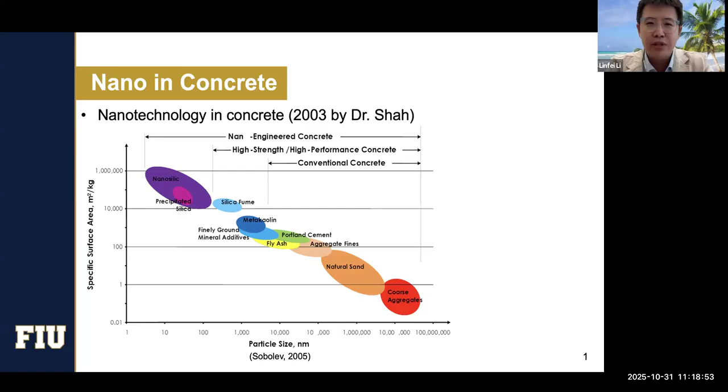So we started adding metakaolin, silica fume, or other fine supplementary cementitious materials. After that we kept diving deeper, and then we thought, maybe we can use nanomaterials as well. There are a couple of different types of nanomaterials - people claim there's 1D, 2D, and 3D nanomaterials.

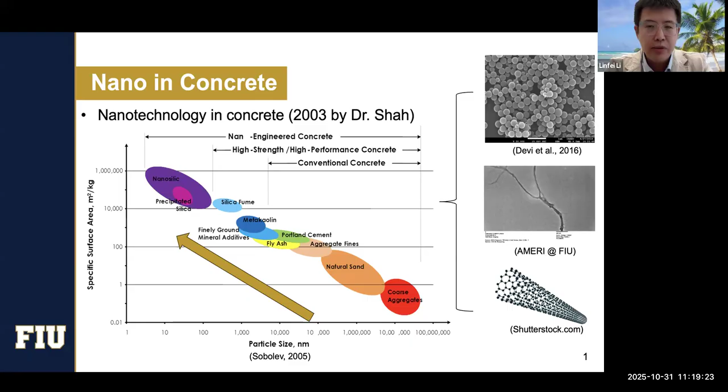To give you some examples: 1D nanomaterial like nanosilica has a spherical particle shape. 2D materials - we took this TEM image from AMERI - is a cellulose nanofibril. And there are also 3D microstructures of nanomaterials, like carbon nanotubes.

But why nanomaterials in concrete? First of all, we have to know that concrete is a porous material. If we take a look at the macrostructure of the buildings we use concrete in a lot, we see it's a pretty solid block. But if you dive in and focus using a microscope, you see the mesostructure - you have cement, sand particles, aggregates - it still forms a pretty solid microstructure.

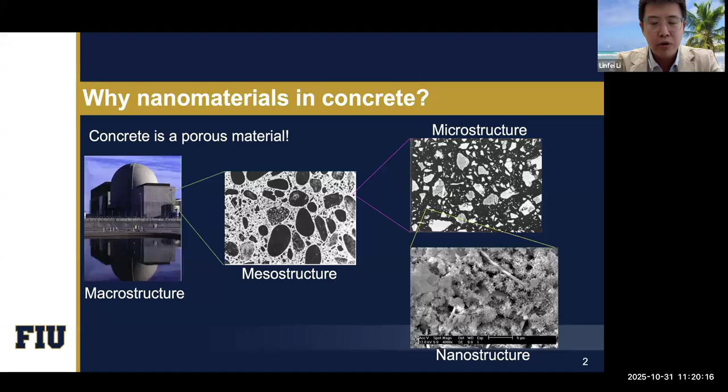But if you further dive into the microstructure level, the cement paste, you have unhydrated cement and hydrated cement. You'll be able to see some pores, but not much. If you further dive into the nanostructure, you can see all the CSH, all the crystals growing, all the ettringite - you can see there's tons of porous media you can play with. That's how we started thinking maybe we can use nanomaterials in it.

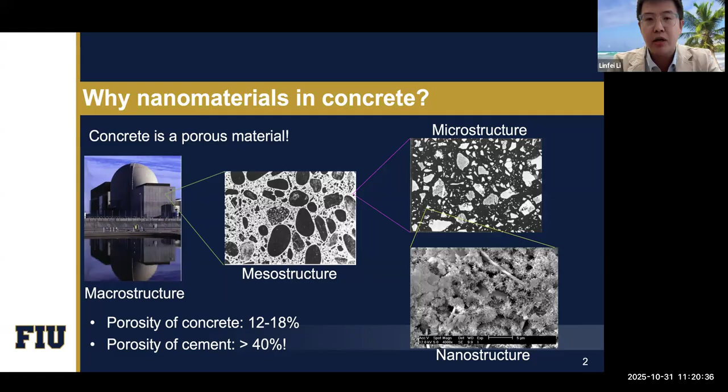To give you some background, the porosity of concrete is usually about 12 to 18%, but the porosity of cement is 40%. So with rocks, gravels, and sand, maybe you cannot do much with nanomaterials, but with cement you have huge possibilities to play with nanomaterials.

Several things we've been investigating in the past years, along with other fantastic researchers - we know nanomaterials could do a lot of good for concrete. Right now it's at the lab scale. We've demonstrated that different types of nanomaterials can improve mechanical performance because they themselves have superior mechanical performance, and they can also densify the microstructure.

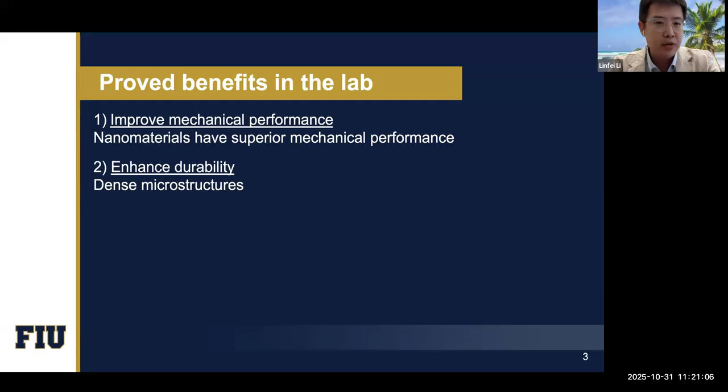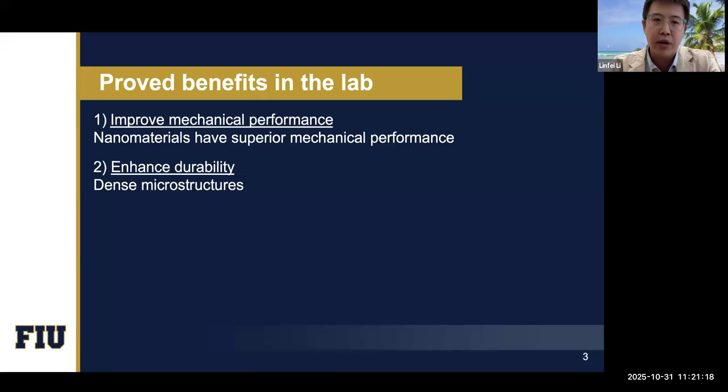Apparently durability is a big issue for concrete. If you can have a denser microstructure - which means filling with nanomaterials makes your concrete denser as well - then you improve the durability.

A lot of research also talks about improved hydration. There's a classical theory called the nucleation seeding effect - because nanomaterials are very small, when you add them at the beginning during the hydration process, the nanomaterials can serve as a seed. Basically all the CSH can grow on the surface of that, so you can improve hydration as well.

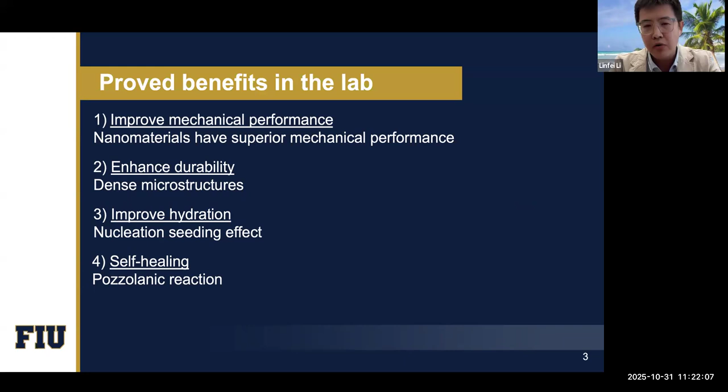Self-healing is another hot topic recently, people talk a lot about it. As a nanomaterial itself, some of them, for example nanosilica or nanoalumina, can form the pozzolanic reaction to improve hydration. Once you have cracks opening, you have the nanosilica in it, so it can further react with unhydrated cement particles, giving you self-healing properties to heal the cracks.

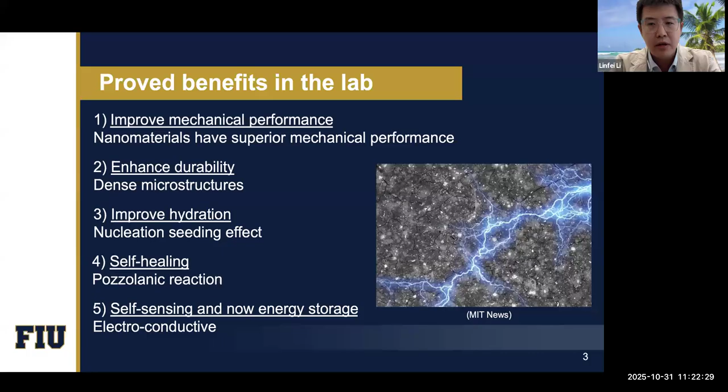Self-sensing is not new, but in the past several years MIT developed electroconductive concrete, or energy storage concrete. People started incorporating carbon black or carbon-based nanomaterials, making concrete not only self-sensing but also able to store energy at the same time.

We got this data from Web of Science, and you can see there are still a lot of interest and tons of publications in the past years. So it's still in a growing trend.

Now we know all the background of nanomaterials. We know this is a fantastic material with tons of different advantages, but we should adopt that in real world applications, right? But the reality is, if you search online, in the United States we only have, I would say, less than 5 demonstration projects.

I took 2 of them. One is from Indiana DOT, where people incorporated nanosilica to do a bridge deck pouring, and the other from Corvallis, Oregon, where people are using cellulose nanocrystals for a parking lot and a box girder demonstration project. You cannot find even 10 projects happening in the US, but we already know this material is good.

Why is that? Simply put, there are only two things. One is about the dispersion of the nanomaterials, because when you really divide materials into the nano level, you have the van der Waals forces problem. The nanomaterial is very easy to agglomerate together, so you will not show the magic from nano, you basically end up with agglomerated micro-level particles.

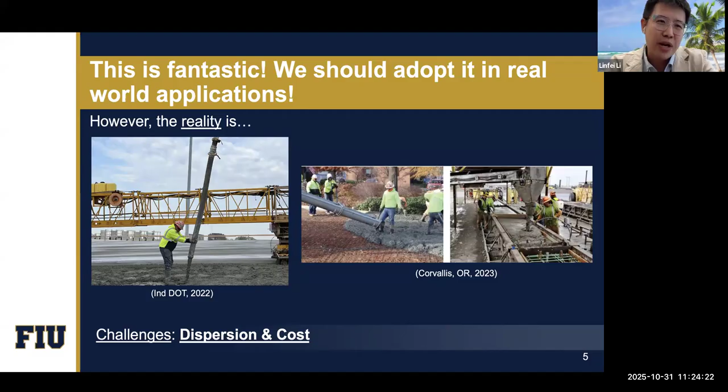So it does not work very well, and it's also correlated with cost, because we all know doing revolution on concrete is very challenging. It's not because we cannot create a better concrete, it's all because of the cost, since concrete is so cheap. Now the question is how you can incorporate a relatively expensive material into a relatively cheap material for wide application.

In the past years I kept asking myself, where is the future of nanomaterials? A couple of things we figured out is that we shifted to two different directions. One is thinking about how we can make nanomaterials cheaper and more sustainable, so we can get extra credits from that and also be more cost compatible with concrete. The other is, for some infrastructure applications where you do not care too much about cost, for example some high-end or special applications, that may be possible too.

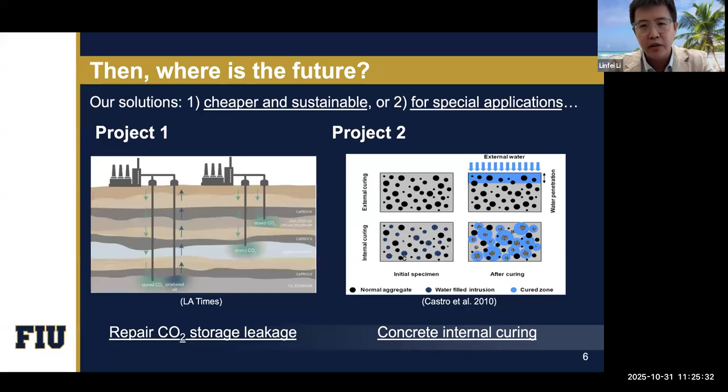So here we're going over 2 different projects for today. The first project I finished a couple of years ago when I was a PhD student, where we incorporated nanomaterials to repair CO2 storage leakage. The other one is an ongoing project, currently using cellulose nanofibril as an internal curing agent. Let's dive into the first project.

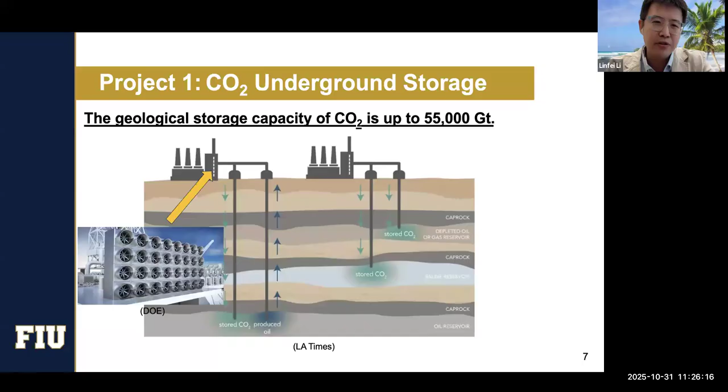Back to 10 years ago, it was a quite hot topic. People talked about the geological storage capacity of CO2, and figured out there is huge potential—you can just store the CO2 underground, because at this moment we do not exactly know how to use CO2 as energy. So temporarily storing it underground is a possible way to do it, and at the same time you can have the oil produced. It's more like a pipeline system. DOE started to capture CO2 from the atmosphere and then used a wellbore system to inject the CO2 underground.

If you take a look at this wellbore system, it basically has a steel casing in the middle, so it's pretty narrow. The width of that sometimes can go below 3 inches. And then you have the rock formation. So people drill a hole and put the steel in it.

But at the same time, you also have to fill the cement in the middle, trying to fill the gaps. Otherwise the gas or oils is going to leak, right? But the problem is this kind of cement has to inject from the steel pipe, go all the way to the bottom, and flow back to fill all the gaps.

So this kind of cement material is very, very flowable, and they do not have any sand particles or aggregates in that. As a result, you can imagine in the underground environment, this cement, because it's very thin, and also because of the underground harsh environment with high temperature and high pressure, is very easy to get cracked.

So once the cement gets cracked, well, the steel casing is only 3 inches diameter. How can you send people like 1 mile or 2 miles underneath to fix it?

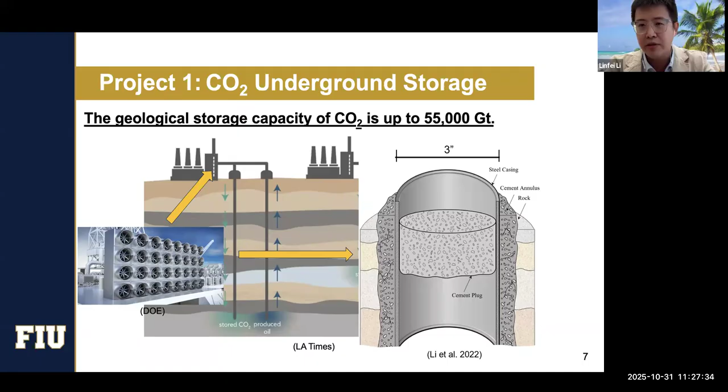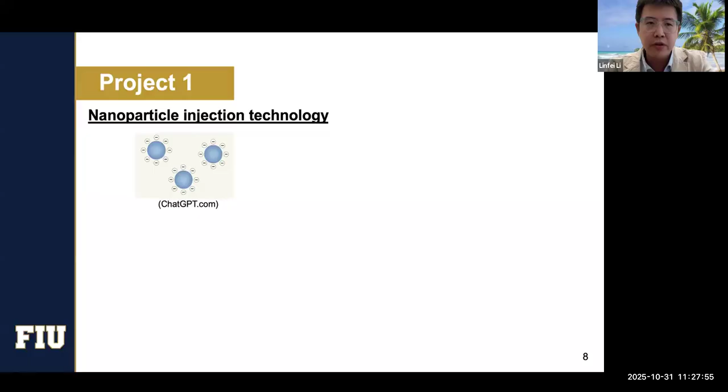That's why we developed this kind of technology. It's called nanoparticle injection technology. Simply said, the idea is that nanoparticles - I would not say all of them, but most of them - have surface charge on it. So we kind of borrow this idea because of the surface charge, and we can generate an electromigration system.

Some of you may be very familiar with this testing setup. It's basically the standard rapid chloride penetration testing system, but we further did some modification on it. On one side, we did not use the sodium chloride solution, but instead we used a nanoparticle solution. Because of the surface charge, you can generate electromigration and use electrical driven force to push the nanomaterials into your cement.

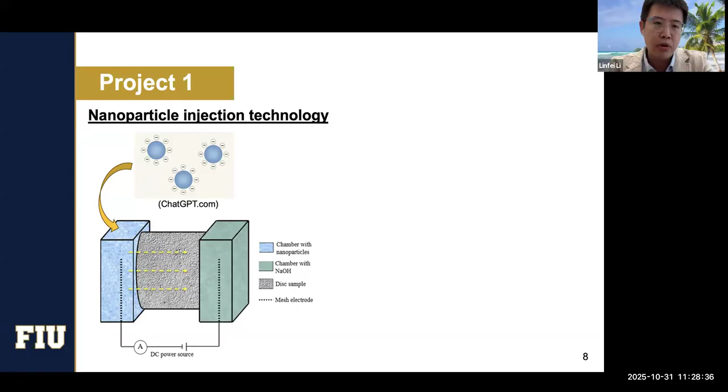This can help to seal, basically densify the microstructure, but more importantly, to seal the cracks. So this is basically the idea - exactly the same setup as the RCPT test.

About this nanoparticle injection, or we call it nano repair, we started doing experiments using something called class G well cement. I don't think it's ASTM standardized, but it was listed in the API, American Petroleum Institute standard. In the standard, they require you to use water cement ratio as 0.44.

Imagine if you have water cement ratio as 0.44 without any aggregates, it's basically just like a liquid, very, very flowable. This is how they use it for the underground project. And we started with an intact sample to see how it works with injection.

But at the same time, we also wanted to see if we really have the cracks. So we artificially generated some cracks as aged samples. And then we put the samples fully saturated, and started running the test.

We do not know exactly which nanoparticle will be the best, so we listed a couple of them as candidates, including a colloidal nanosilica with 22 nanometers diameter, nanoalumina, and TEOS, which is another precursor of colloidal nanosilica. It has better agglomeration control because it does not form particles immediately, but it's a trade-off - it has weaker surface charge.

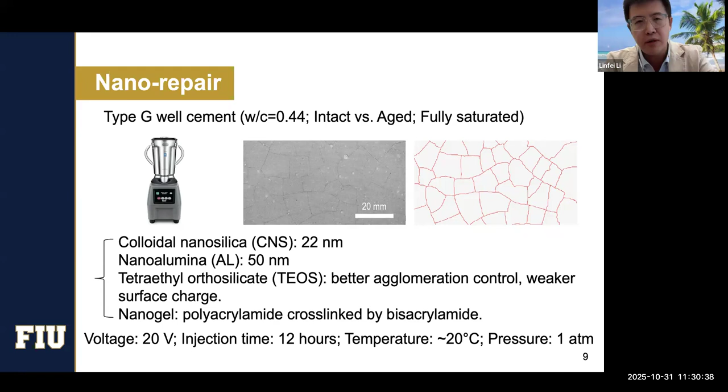So some of the results we have - first of all, we measure the porosity of the cement. As you can imagine, there's no accuracy in that, as also shown in the previous slides. The cement itself has around 40% porosity. We measured exactly the same - we got 42.13%. And then we set up the sample to run in the test.

And after 12 hours, we get it out. We're trying to measure - it's pretty tricky to measure how the nanoparticles seal the cracks. So we started from the porosity measurement. We have the sample, cut it every 10 millimeters as a slice, and then measure the average porosity of that.

As you can see, we have a pretty clear trend. Close to the injection head, there was more than a 2% porosity decrease. If we look at the percentage, for intact samples, the colloidal nanosilica shows the best performance. For the aged samples, it's different.

We need a little more information about the nanogel, because it's a very unique material. When you add the basic cross-link at the beginning, the nanogel is a nanoparticle, but over time this material expands. For an intact sample, once you inject the nanogel, it will expand and further damage your cement. It's kind of tricky. But for aged samples, since you already have large cracks, this expansion actually helps seal the cracks.

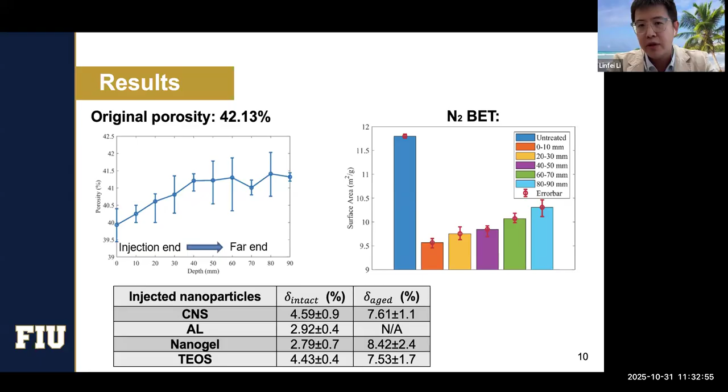We also did some X-ray microscopy. For this, we used custom small samples with a cup as a holder, and added a little water at the bottom. We're trying to see, once the nanoparticle is injected, the sample should be denser, so we expect the water uptake to be much lower. That's why we set up this X-ray microscopy, to see how the water moves up to the top of the sample. Here are some of the results we got.

On the left-hand side is the untreated sample; on the right-hand side is the injected sample. As you can see, there's a clear trend in the intensity, which has significantly dropped. Based on the derivation of that, we're able to track the wetting front as well. So from the X-ray microscopy we can indirectly prove the concept: the nanoparticles were successfully injected and can make the microstructure denser.

One more thing, for the early age profile and later age profile: for early age, we started scanning immediately, but for later age, every time you run the test it takes about 3 hours, so we just ran 2 tests.

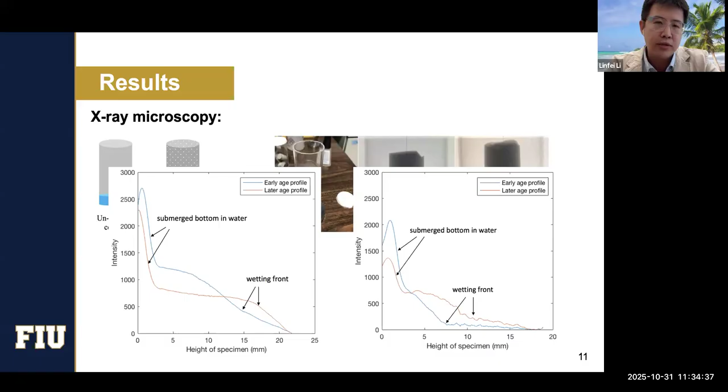We also did some chloride permeability testing, because if you have a lot of pores, your sample is fully saturated, meaning relatively higher electroconductivity. But since silica is more like a semi-insulation material, if your nanosilica is sealed in the pores, the charges or electrons won't be able to pass through. That's why we tested one untreated sample and one with injection, and there's a clear trend there too. The charge passed is significantly lower, about a 24% decrease, meaning chloride ions, once you apply external current, can't easily transport from one side of the sample to the other, just because of the nanoparticle injection.

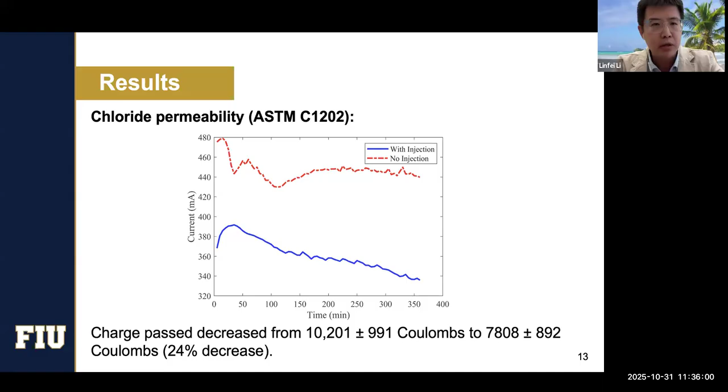All right, so we proved the concept from the small scale, and then we thought about scaling that up, so we did a prototype test. This work took a lot of effort, designing and going back and forth with the manufacturer, and we finally built this pressure vessel, trying to mimic the real underground environment. As you can see from the drawing, this pressure vessel is about almost 10 feet high.

So all the bolts, every time we open that, we have to use the hydraulic wrench. Even opening the lid is going to take us a whole day to do that.

And then to mimic the rock formation, we cut some hollow concrete pipes for it. At that time we double-checked the elastic modulus of the surrounding rock and concrete, and they're pretty similar. So that's what we can use to mimic the rock formation.

But regarding the capacity of this pressure vessel, we'll be able to do a full-scale underground environment simulation. At the same time, this can pressure up to 14.2 megapascals. So imagine if this is fully pressured, it's going to be like a small-scale nuclear bomb.

And it can also hold the temperature up to 90 degrees. So we're using 90 degrees C to mimic the cement curing in a realistic condition.

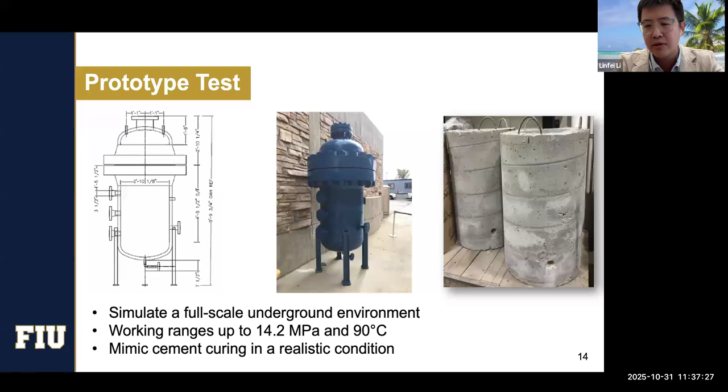So for the test setup, we set up a steel casing, which is exactly the same size as for the underground project. We put that in the middle, and then cast the cement between the concrete surrounding and the steel casing. Later on we took it out and ran the injection.

So we set up two reservoirs, like we did for the small scale — one side is the sodium hydroxide, the other is the nanosilica. We figured nanosilica might be one of the most promising ones, so that's why we took it as one, but we also tested other different types.

To mimic the real underground environment, we boosted up the temperature from room temperature, as we did for the lab scale, to 80 degrees C. And we also pressurized that from atmospheric pressure to 6.89 megapascals. We didn't go to the maximum because I feel like we have some safety concerns on that.

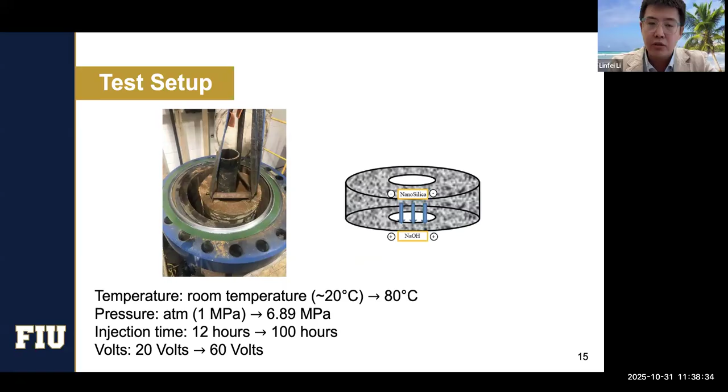Also, because the sample is much, much larger, the injection time extended from 12 hours to 100 hours, and the voltage from 20 volts to 60 volts.

So here's some preliminary data we got from that. As you can see, we did the same thing — we basically drew a core from the sample, then cut that into slices, and measured the porosity of that.

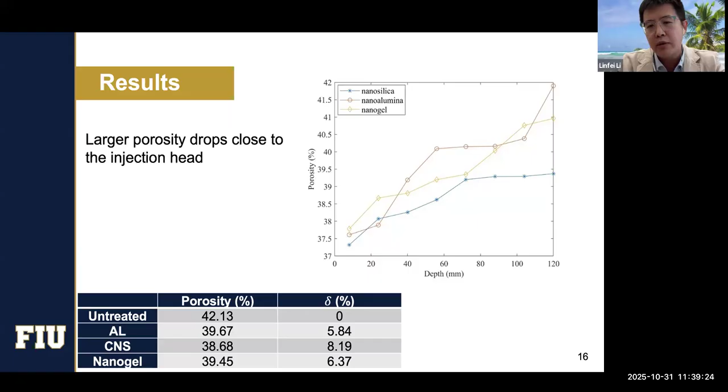We got a pretty similar trend, relatively consistent across different types of nanomaterials. For example, we had porosity of 42.13%, and with alumina colloidal nanosilica nanogel we'll be able to see some porosity decrease. We calculated the relative porosity change. We didn't do much more on that until the project ended, but since we measured the porosity, I think it's kind of a partial success for this project.

After we finished the experimental work, we were thinking maybe we can do a little bit of modeling to save us a lot of time trying to figure out how we can optimize the nanoparticle injection. So that's why we started brainstorming how we can model the nanoparticle injection process.

At the same time, we also thought there might be a possibility, since you're using exactly the same setup for rapid chloride penetration as well as chloride removal, that once we inject the nanoparticles we can also push the existing chloride ions out of the system. So we can have kind of a dual benefit from it.

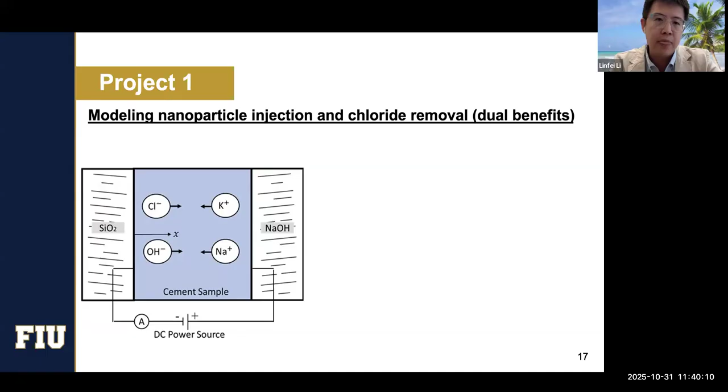For modeling this process, most of us know chloride diffusion — we can easily use Fick's law, right? But since in this case you have external current applied, it's not only a diffusion problem, you also have the external current applied. That's why we have to further extend Fick's law to the Nernst-Planck equation.

So you have two parts: you have the diffusion part, and you also have the electro-driven part, or what we call the migration part.

But the problem is in this case you have two different variables — one is the concentration, the other is the current. So you can't solve two variables in one equation, which means we have to use another equation. So we're basically coupling that with a Poisson's equation. Now we'll be able to solve two different variables by using two different equations.

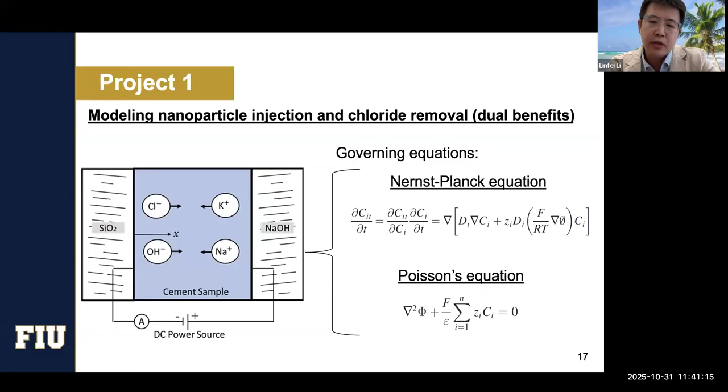So we developed finite element modeling and solved the coupled equations together. Here are some examples of the parameters we're using: we consider in the system, from the injection head, we have silica ions, nanosilica, and on the other side we're using sodium hydroxide.

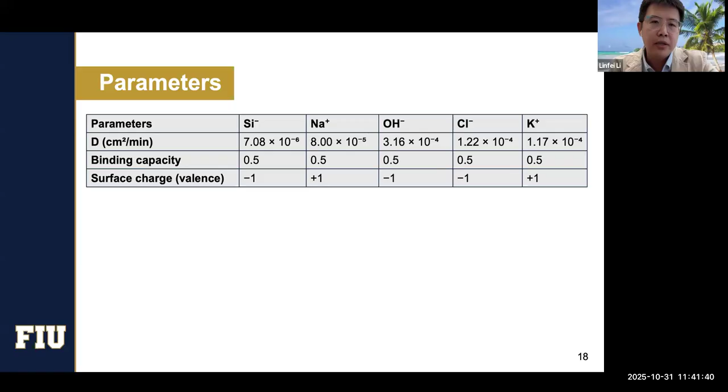So we have sodium hydroxide on the other side of the reservoir. But we also consider in the system some of the ions already existing in the system, so you have chloride ions and potassium ions in it. We'll also be able to dig out the diffusivity of each ion, the binding capacity, as well as the surface charge or valence.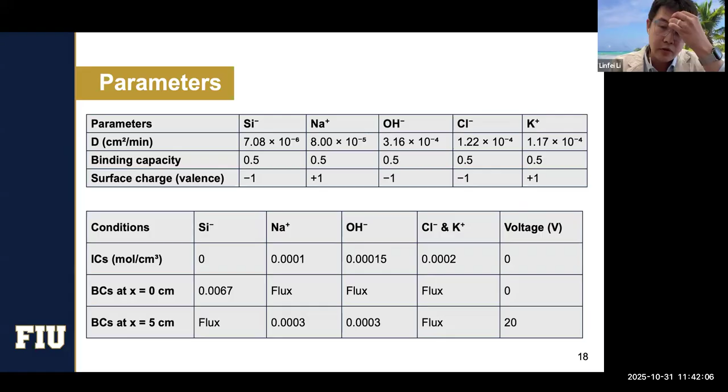So finally, about the initial condition and boundary condition which we just introduced, and for the voltage, because we set up the external current, the positive side will be sodium hydroxide, and the negative side will be the nanosilica.

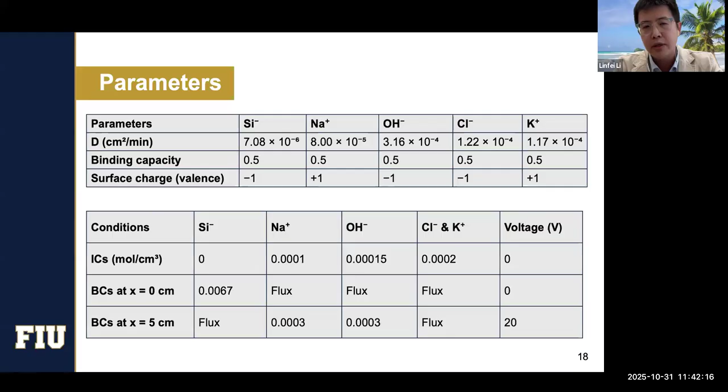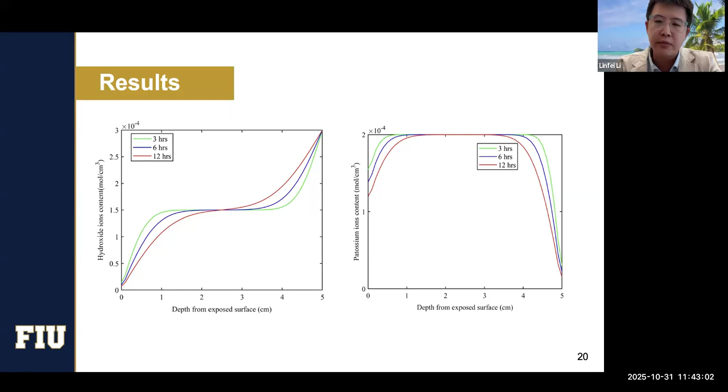And the last one is about chloride removal. As we mentioned earlier, the chloride ions might present a possibility for dual benefits, because chloride ions also have surface charge. So if you set up this system, the chloride ions could possibly be removed from the cement samples.

So we did modeling as well as some experiments. For the experiment, first we ran the RCPT test, intentionally injecting chloride ions into the cement sample, giving us an initial content or concentration of chloride ion in the system. After that, we ran another round of the exact same test setup, but replaced the sodium chloride solution with a nanosilica solution.

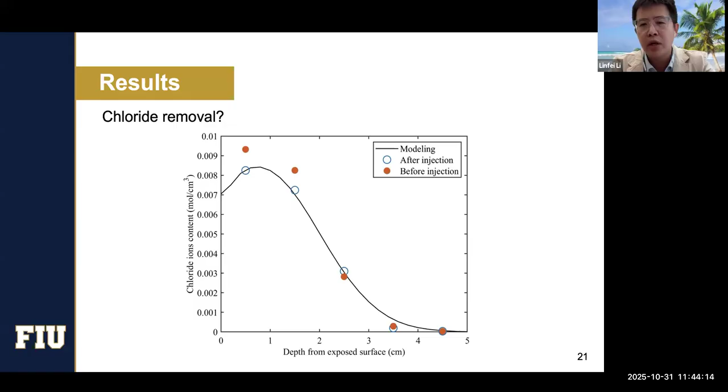All right, I might be talking too fast, but we can certainly take a break on that.

So just a little bit of conclusion on this project. We know nanomaterials are apparently costly, but ideally you can justify that for some special infrastructure applications, for example underground projects, because it's very difficult to send people a mile or two underground to fix cracks. The other important thing is that you don't exactly know where the cracks are, so this technology shows great potential.

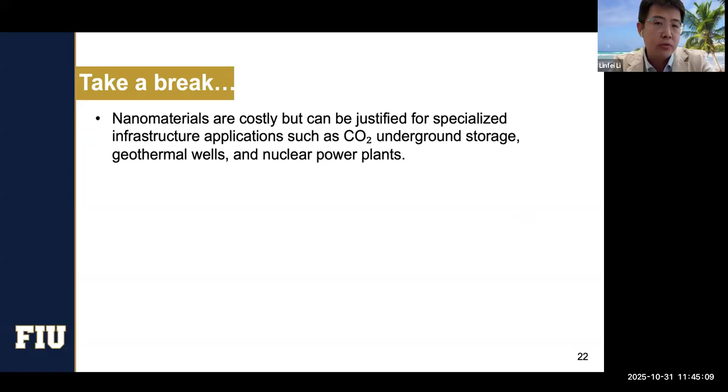So you can basically remotely seal the cracks and repair all the potential leakages. This technology could be applied for CO2 underground storage projects, as well as geothermal wells or even nuclear power plants.

Through the development of this technology, we can remotely reduce the porosity and repair cracks, while also benefiting from chloride removal. So again, my conclusion is that this technology will not be applicable for regular infrastructure, because I think the cost is not worth the effort. But for some specialized infrastructure, it might be considered.

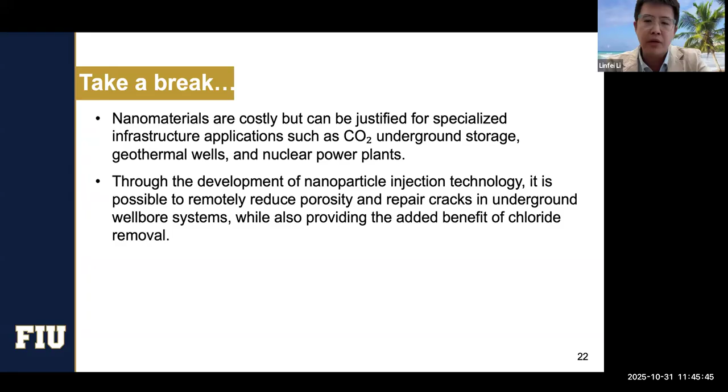And finally, with the wet model, we use the Nernst-Planck equation coupled with Poisson's equation. This lets us model the electromigration process involved in nanoparticle injection, and this coupling model can also be applied to any different types of chloride penetration problem.

In the past we just used Fick's law, but we never considered all the ionic strengths in the system, like potassium ions and sodium ions in the pore solution. So I think if we want a relatively accurate prediction, using this model will be much better than the current Fick's law.

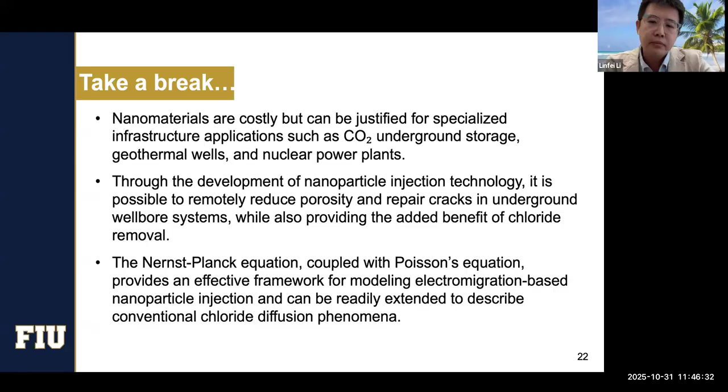Now we can move to project 2. I'm very excited about this project because we're getting a lot of attention. Internal curing in the past year is a big deal, even FHWA formed a committee called EPIC squared, pushing forward internal curing technology of concrete. This is an ongoing project, so we don't have all the results concluded, but we can talk about internal curing.

Why do we have to do internal curing? As everyone knows, concrete needs to be cured. You need to keep getting moisture from the atmosphere. That's why for on-site applications, you have to either keep pouring water, do the fog on it, or cover it with burlap to keep the moisture.

So your cement will have enough water or moisture to keep hydrating. But internal curing technology is basically incorporating material which can hold some of the water, kind of like a micro reservoir. This water can slowly release during the hydration process of the cement, so you do not have to keep adding the fog or water or covering it.

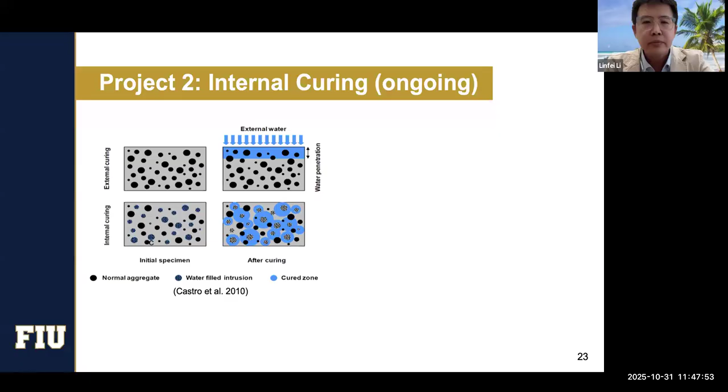The concrete can be cured very well. But at the same time, let me give you a quick fun image. It's like if you have a baby - if you keep giving cement the milk, which means the water, cement will be happy. Cement will grow stronger and have pretty good microstructure, strength, performance, durability, anything. But if you do not have enough water in your system, your baby will start crying because it needs the water, the milk.

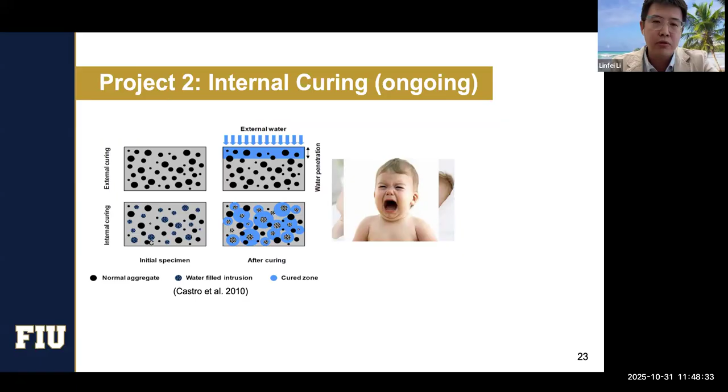So this is how internal curing could possibly continuously give the cement water and moisture, so the cement can be cured very well and grow up. If you don't have enough moisture or water in your system, as a result you have shrinkage of concrete. Shrinkage of concrete, as everyone knows, is a big problem, especially for some types of shrinkage, like plastic shrinkage or autogenous shrinkage.

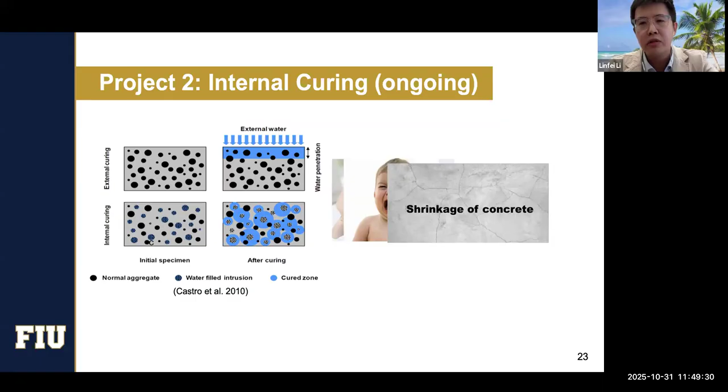These happen in the very early stage. We know for a lot of types of concrete materials, the concrete is pretty dense, so it has pretty good durability. But imagine if your concrete starts cracking in the first month or just the first 10 days - you'll be in trouble because all the harmful ions like chloride or de-icing salts will easily penetrate into the system. You'll get corrosion of rebar. If you use it for coastal infrastructure, sulfate ions will easily penetrate as well. So we have a lot of problems - shrinkage is a really big deal for concrete durability.

This gives you a little bit of concept, because we're talking about internal curing - internal curing directly benefits autogenous shrinkage, which happens in the first 10 days of the concrete. Autogenous shrinkage is basically because the cement needs water to be cured.

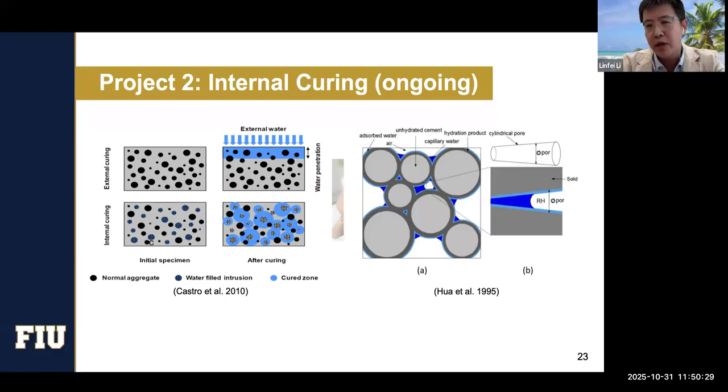But right now, since we're driving crazily toward high strength concrete or UHPC, we use a lot of low water-to-cement ratio concrete. In low water-to-cement ratio concrete, you do not have enough water in your system to continuously feed your cement. As a result, the cement will continuously pull water from the pores, and they will generate a kind of negative pressure - we call that the self-desiccation process. That's why this kind of pressure will finally cause shrinkage and crack your cement.

A little bit more information - self-desiccation will start immediately from the relative humidity drop. But considering your cement is hydrating, the cement is gaining strength over and over, so people did not think at the beginning this would be a problem. But autogenous shrinkage - people define that if you have relative humidity below 93%, you definitely need to consider the risk of autogenous shrinkage, which will happen to your concrete and generate cracks. It's more specific for low water-cement ratio - if your system's water-cement ratio is below 0.4, you have a more serious problem because you don't have enough water in your system.

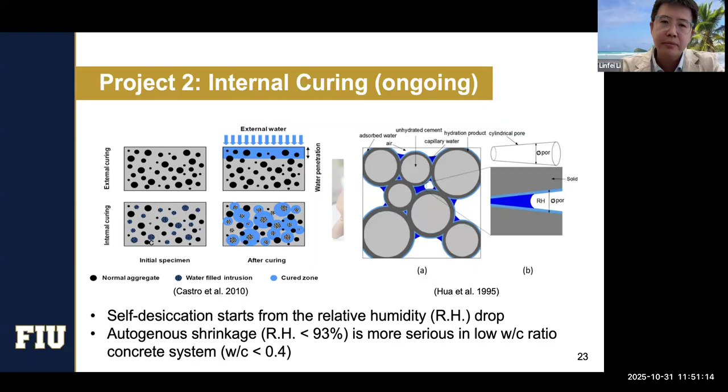A little bit of information on some available technology - I think the first one is lightweight aggregates. Lightweight aggregates has been proven very well in the past years because this material is relatively cheap, and you can just use that to replace some of the fine aggregates. As you can see from the photo, it's relatively porous, so it can hold a lot of water. So what you need to do is just pre-soak the lightweight aggregates.

So it has relatively high absorption capacity. The lightweight aggregate can carry some of the water in the system and later on just release that. But the problem is that, from the composite mechanics point of view, your aggregates become more porous, so that's why it will also reduce the strength of concrete.

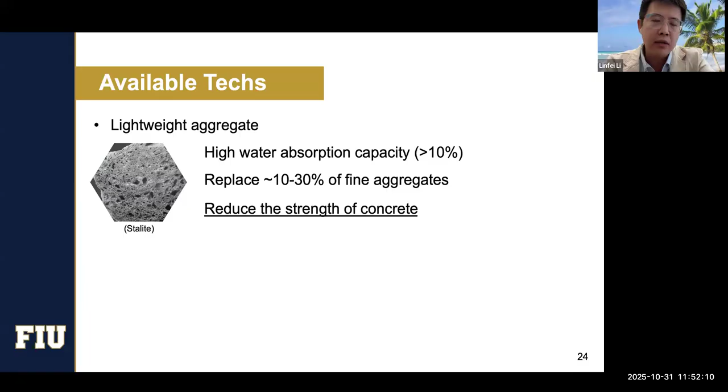So we have a paper published last year. We did some work with the lightweight aggregate, but same thing, the more we were adding, the strength was going down.

And the other one that's been mentioned many times is SAP, super absorbent polymer. If you don't know this type of polymer, it's being widely used for baby diapers. This kind of polymer can also absorb a lot of water by basically expanding. The good thing is that you only need to add less than 1% as additive - you don't have to replace anything from your concrete matrix. And they can serve as a micro reservoir, holding water into the system and releasing it.

But recently, adding SAP into the concrete system has drawn a significant durability concern, because this material is biodegradable, and after several years it's broken down, this material leaves pretty big pores in your concrete matrix, which draws significant concern, for example freeze-thaw damage. Because for freeze-thaw, you have to control well the size of the pores, otherwise you'll be in trouble.

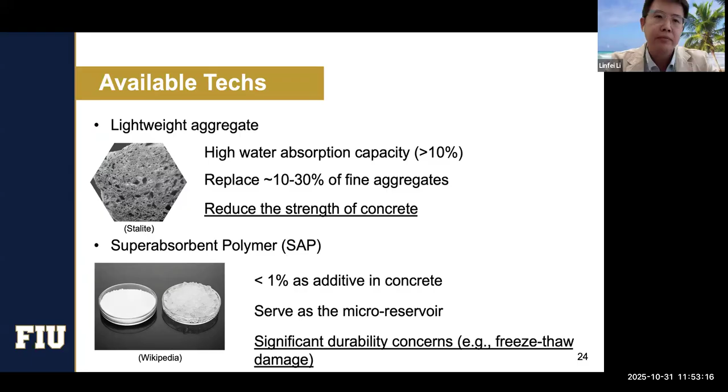So how can nanomaterials help? Here we want to introduce one type of nanomaterial we'll be using specifically for internal curing. It's called cellulose nanofibril. People also call that CNF.

As you can see, we took this image. We got cellulose nanofibril from University of Maine, PDC, which is a process development center. This is 3% CNF slurry with 97% water. It's more like a gel, or a cream. You can imagine how this material can hold water.

If you took some image from the TEM, you'll be able to see this is a fiber. This is not a cream.

And why are we using that? First of all, we know this material is a wood-based product, so it's sustainable, it's regenerative, and the process of getting that is pretty simple. You don't have to do any chemical modification, you just need to do the mechanical grinding. The University of Maine has an industry-sized facility, so they're basically generating the cellulose nanofibril and shipping it internationally.

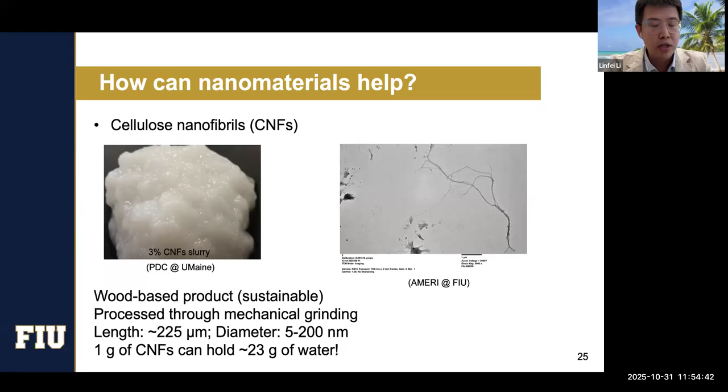We know this material has a length around 225 micrometers, but the diameter is from 5 to 200 nanometers in range, so that's why we can call that nanomaterials. The other data point, based on what we found so far, is that 1 gram of cellulose nanofibril can hold more than 23 grams of water. That's impressive, so this is why we started thinking about using that for internal curing purposes.

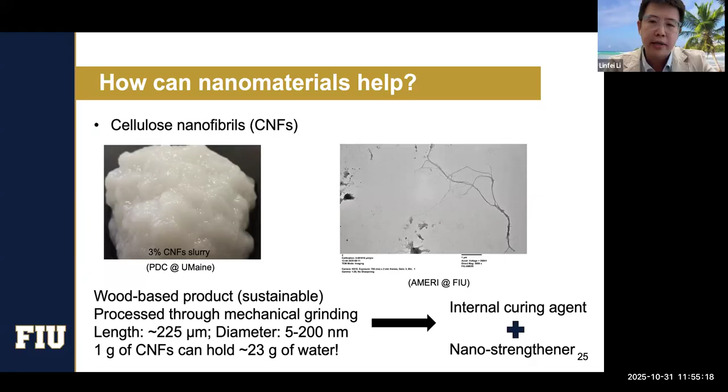But more importantly, compared to the other two, we're not only focused on mitigating autogenous shrinkage as an internal curing agent, but because this material is a nanomaterial, we also want to see if there's a possibility it can serve as a nano-strengthener in your system and basically strengthen your concrete, make it denser, and improve the durability as well. So we can basically do two things at the same time.

But for internal curing purposes, I think the first challenge is how we can determine the water retention value of that, because the CNF - well, it cannot carry excessive free water into the system. Otherwise, if you have excessive water in your system, you release it immediately and bring up the water to cement ratio, which is not good, because we always want to keep the water cement ratio controlled.

This is why we have to determine what is the SSD, the saturated surface dry condition of the CNF. But it is really challenging - it's not like for the lightweight aggregates, where you can do ASTM standardized testing, or for the superabsorbent polymer, where you can also do the tea bag method. For this material, there's no exact way how we can quantify that as saturated condition.

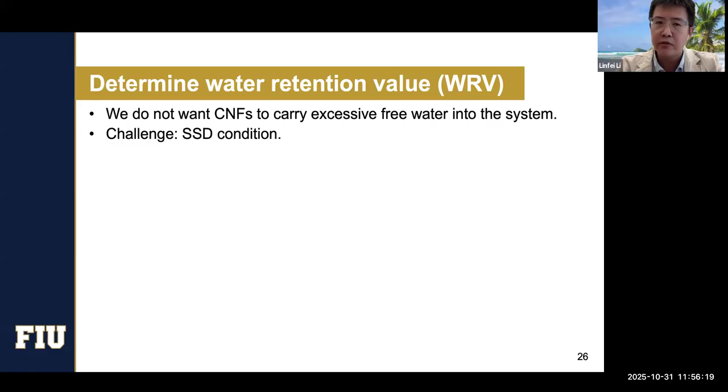So here, my student and I, we spent a lot of effort on that, trying to figure it out. It turns out we used two different methods to do that. The first one, we use a centrifuge. For centrifuge, there are also two different standards which have been published, where people claim that as SSD for cellulose nanofibril.

So one is TAPPI, which uses 900 G for 30 minutes. The other one is the international standard, which uses 3000 G for 30 minutes.

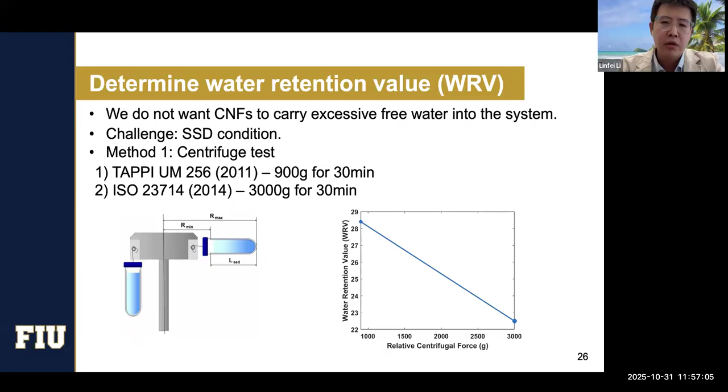So we run both of them. For 900 G, the retention value for the CNF is about a little bit over 28 grams per gram. For the 3000 G, it's slightly below 23 grams per gram. So all these different standards give us a reference, but we don't know which one is correct, how we can quantify the actual condition.

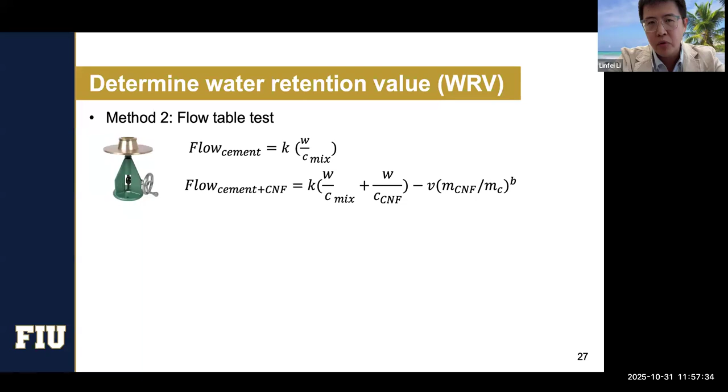So then we incorporated a second method trying to figure it out. It's very simple, just a flow table test, because we know when we're adding the nanomaterials into the cement system, the nanomaterials, because of high surface area, will reduce the flowability of the cement paste.

But at the same time, we're trying to see, because we have the cellulose nanofiber in the system carrying the water, we want to make sure the water it's carrying doesn't contribute to the water cement ratio. That's why we developed this equation to separate the water used for increasing the water cement ratio from the water used for internal curing purposes.

So what we did first was a calibration using the flow table test, just for the cement with different water to cement ratios, and we incorporated the CNF. We quantified that as a dry CNF content with two different water cement ratios, and did the fitting on it. Then, based on the equation we derived, we were able to quantify the water retention value.

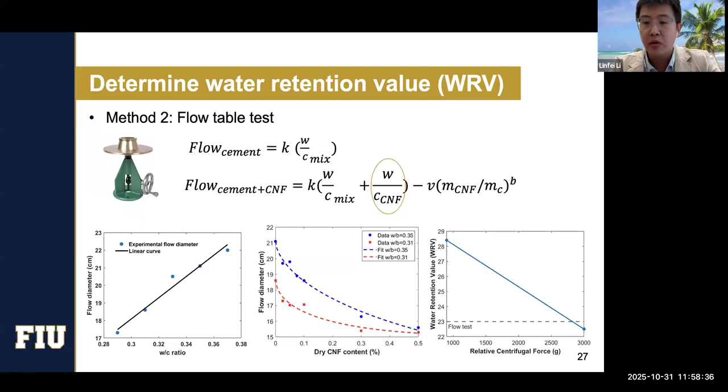The water retention value is around 23 grams. So from this range, we can see 23 grams is good at this moment.

So then following is the desorption kinetics. We also want to know not just how much water the CNFs can hold, but how the CNFs release water at different relative humidity.

I think this creates huge potential, because even as your system starts hydrating and your relative humidity is going down, even if it's still at a high level, say 97% or 95%, the CNFs are very sensitive. They will start releasing water from the system. But lightweight aggregates or SAP may not respond immediately, or just have a slower response.

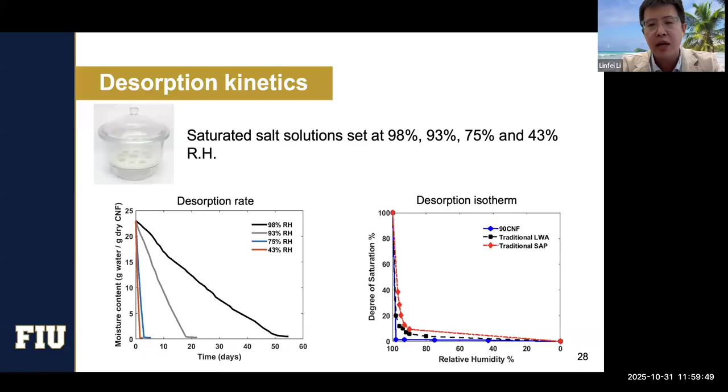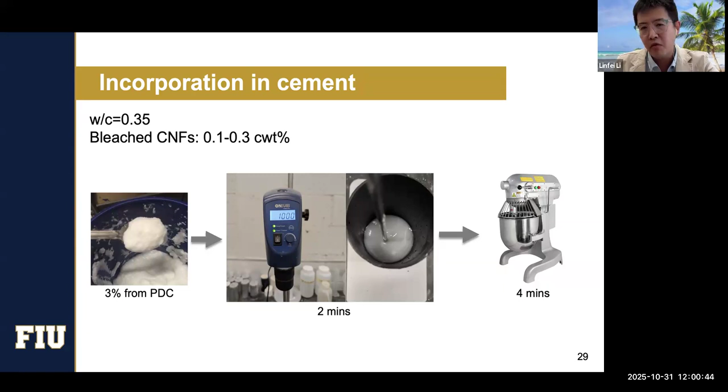And we start measuring, so we got a lot of interesting findings, some of them may be different from what other people find as well. For final setting time and hydration kinetics, for final setting time we just use the Vicat needle. Surprisingly, a lot of people talk about the nucleation effect, but our final setting time keeps getting delayed with more and more cellulose nanofiber added into the system.

We also did some hydration kinetics, which is still ongoing, so we only have results from 0.1 and 0.2%. As you can see, there's not much difference, but there is a slight delay from adding the cellulose nanofibril. I think it's kind of debated - a lot of people talk about either the nucleation effect accelerating hydration, or on the other side, the nanoparticle sticking on the surface of the cement particle.

So it's kind of like being a block or a barrier to stop the water from direct contact with the cement. That's another theory.

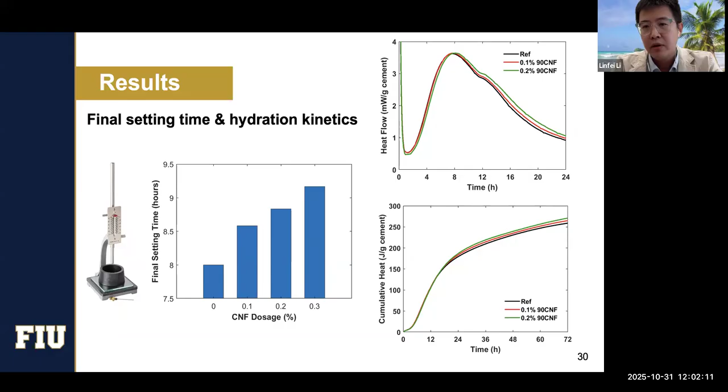People are saying we're not very clear if adding nanomaterials will accelerate or delay the hydration. But based on what we found, without any ultrasonic dispersion, we saw there is a delay in the hydration process. Surprisingly, on the other side, if you look at the cumulative heat, in the later stage it actually goes up higher than the reference sample.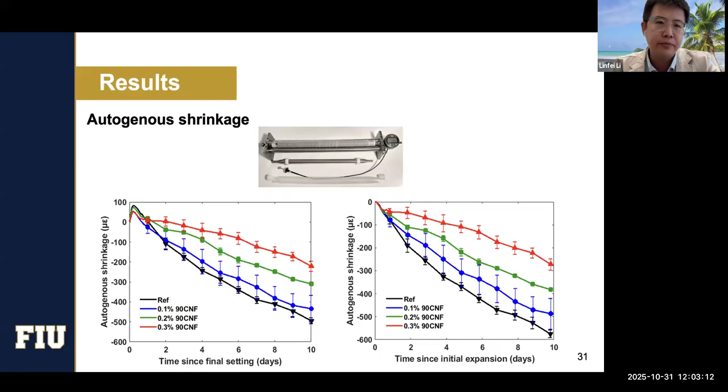It could be because we did not do any specific pre-dispersion process, we just used a high shear force mixer. So we hope we can see more promising results to reflect the curve better. Maybe we can add more, because for internal curing purposes, I think 0.1% might not be enough to completely remove the shrinkage, but we'll still see some decrease.

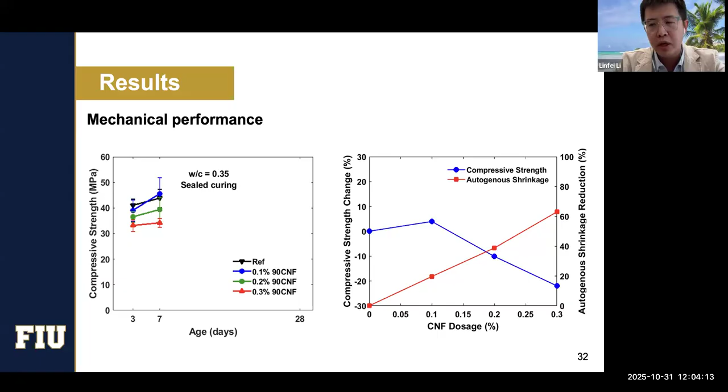Finally, that's another direct observation - getting the relative humidity, because the relative humidity in your system is basically the trigger to generate the autogenous shrinkage. At the beginning we had a hard time because the relative humidity for the cement solution is very high, so most sensors cannot work, since the hydration heat will generate a lot of vapors that can damage or make your sensors inaccurate.

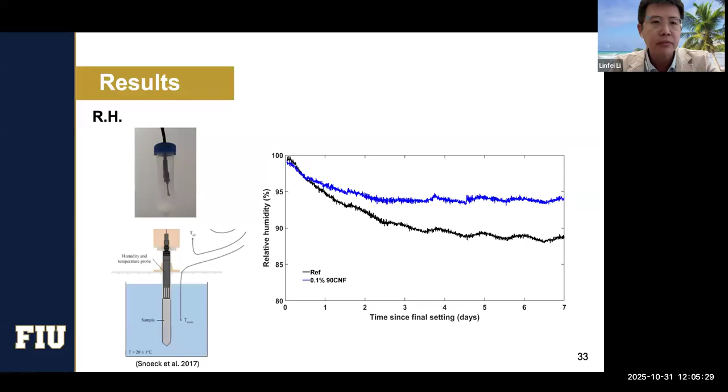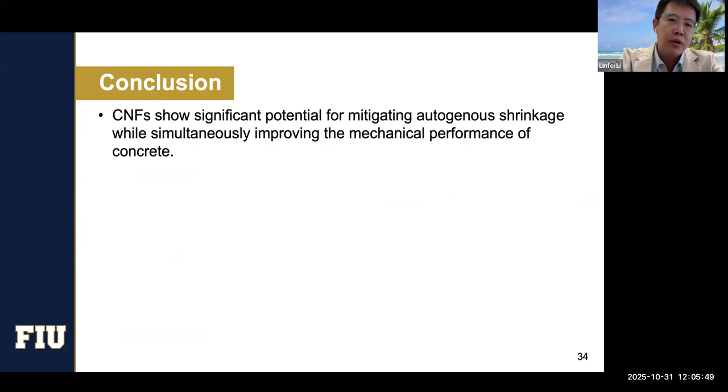So, finally, conclusion: CNFs show significant potential for mitigating autogenous shrinkage while simultaneously improving the mechanical performance of concrete, but it depends on what dosage you are adding into the system. We're thinking maybe dispersion will help.

The CNFs we use now are bleached CNF, and also finely processed - that's why you see the 90 numbers, which basically means 90% fine. We're thinking maybe we don't have to grind it that fine, and at the same time we don't have to bleach it. So maybe we can use lignocellulose or coarser cellulose nanofibrils provided by UMaine. We'll further investigate to see how that affects performance, because if you don't have to bleach it and can use a less fine CNF, the cost will come down as well.

As for the dispersion effect, as I just mentioned, we haven't started yet because I just got the equipment ready. But I think the dispersion effect will help disperse the cellulose nanofibril better, at least better, in the cement or concrete system.

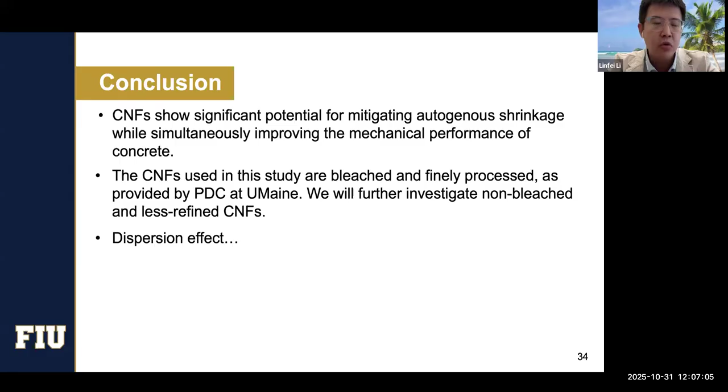So in that case, I hope we'll be able to see if even we add 0.2 or 0.3% at the cement weight, we'll still be able to see the increase of the mechanical performance. And the other thing is, even we did some indirect measurement, like centrifuge testing combined with flow table testing, we can kind of temporarily make a conclusion.

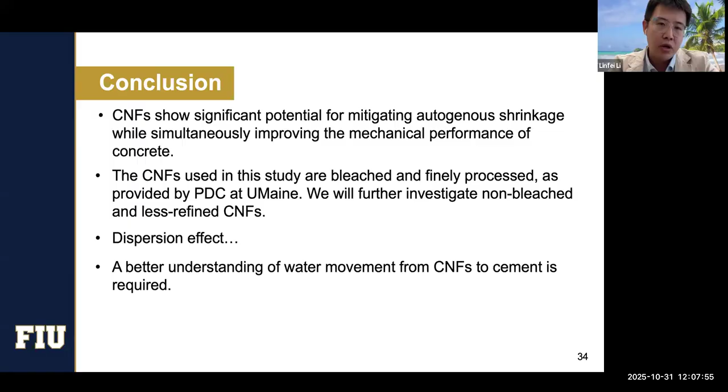We said 23 grams per gram is the water retention value for the CNF, but it's all indirect measurement. So we really want to see if we will be able to capture the water movement from the CNF to the cement during the hydration process. This will give us a direct observation, so we can make sure and tweak our CNF to ensure there is no excessive water increasing the water-to-cement ratio, but we have the perfect amount of water in the CNF that can later be released to the system for internal curing purposes.

So in this case, we basically partner with the National High Magnetic Field Laboratory in Florida. They have very fancy different types of NMR equipment as well as MRI. So we're hoping we can see some good results next month. Stay tuned.

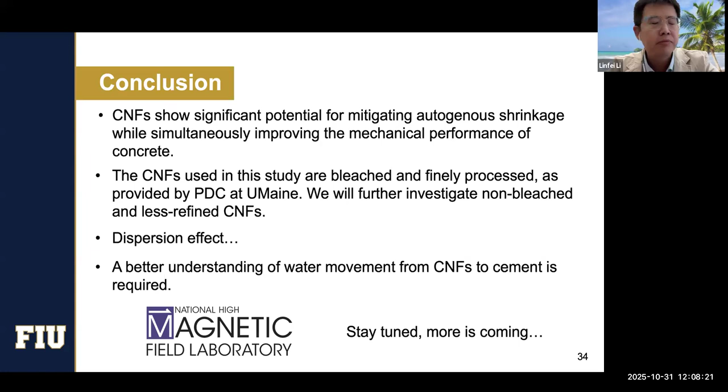Finally, acknowledgement. For the first project, since at that time I was a student, I will acknowledge the funding agency that supported me to finish my PhD at the US DOE, and also my PhD advisor Yunping. He just recently retired this year, and Mia is right now associate professor at University of Colorado Boulder, and she was my co-advisor as well as my postdoc supervisor.

And Pania, she's an associate professor at University of Utah, focused on computational mechanics modeling. And Tom, who also retired from Sandia National Lab, surprisingly I cannot find a headshot from the website.

And for the second project I'm working on right now, I have to say I'm truly grateful to have this kind of all-star team. This project was funded by USDA for the Forest Service P3 Nano program.

So we have Robert, a FPL scientist from USDA. Eric, everybody knows him probably - he's a professor at University of Maine. Colleen, she's amazing, she's the director of PDC, basically providing me all different types of the cellulose nanofibril. And Jason, everyone knows Jason, professor at Oregon State University. He's amazing, he knows all the knowledge about internal curing, and I'm truly grateful to have him on the team as well.

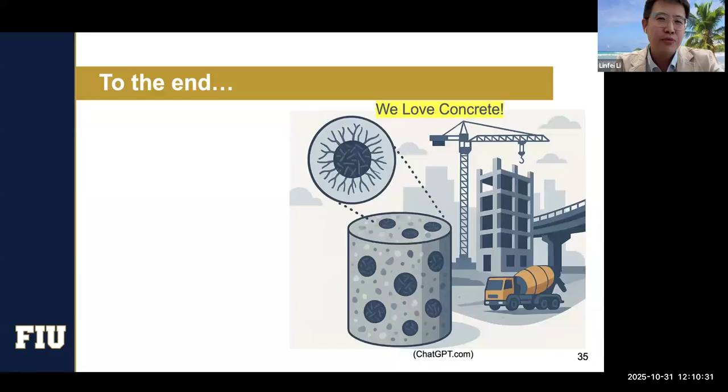To the end, just some take-home notes. First of all, we all love concrete, right? That's why we're here. So I don't want to make the take-home notes too boring, so just one single bullet point: nanomaterials have great potential in concrete applications. It all depends on what kind of application you're looking for. Compared to 20 years ago, I think nanomaterials were very expensive, but nowadays the prices continue going down. I think we have the potential to incorporate them in more and more applications, even in civil infrastructure.

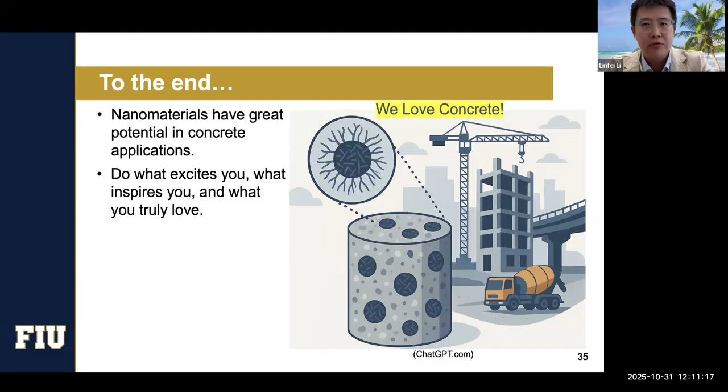But I have more take-home notes for the students and postdocs. I think research is a lot of things, but just do what really excites you and what inspires you and what you truly love. Because otherwise, if you don't have the interest, you don't love the things you are doing, it's very difficult to continue and get some really good results coming out.

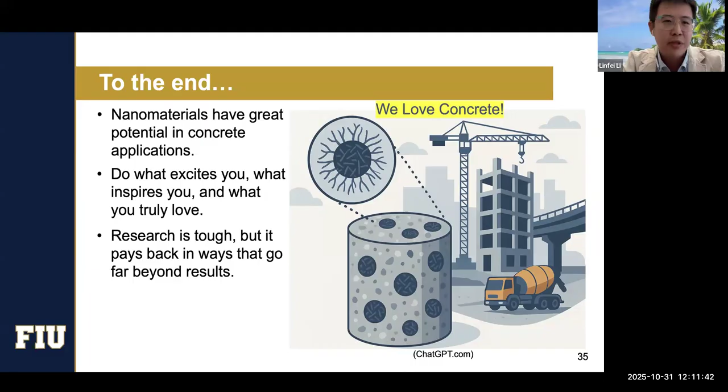Then, well, research is tough, but it always pays back pretty well. This is how I believe most professors enjoy our life in academia. It's not because of salary, it's not because of the flexibility, it's just because we love the work we're doing.

And finally, patience is a key in research. Sometimes you may get frustrated about results coming in completely out of your expectation, but this is how it works. I mean, failing the experiment doesn't mean you failed your life. It might be wrong, but it's still an experiment, still making a contribution to the community. So Rome took time to rise.